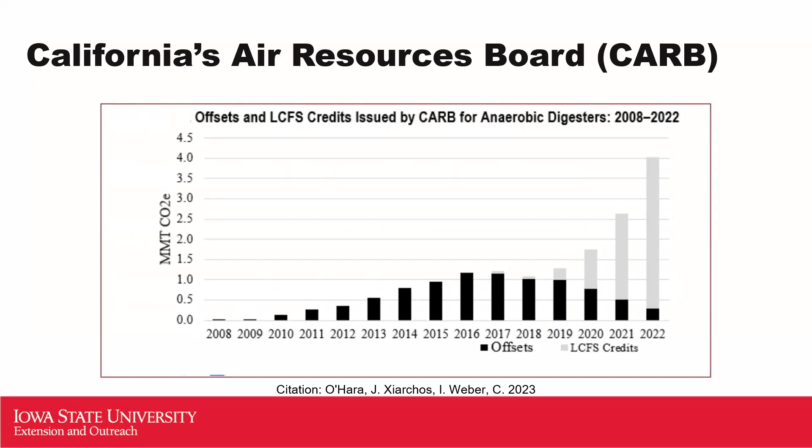Both these programs have been in place for a while, but participation is more towards LCFS. Looking through the citations and their data, you cannot be stacking both projects. They're wanting you to be a participant in one or the other. But it started out with carbon offsets where methane was just being flared, but now into LCFS where you can actually get the transportation fuel credit for it.

Price-wise, I looked through some of the data for where the LCFS market for California's credits are. We are actually down to around $55 per ton. It actually was pretty high, around 220 at one time, I believe, back in early January 2020, but still pretty good numbers to work with.

Average $75 per metric ton. So for natural gas, that turns around, natural gas is around 53 kilograms of CO2 per million BTUs. So for a lagoon to digester covered lagoon project, that translates to around $31 per million BTUs. If we take deep pit to digester, you can see the conversion numbers right there. We are at $16 per million BTUs. So those numbers are pretty good numbers.

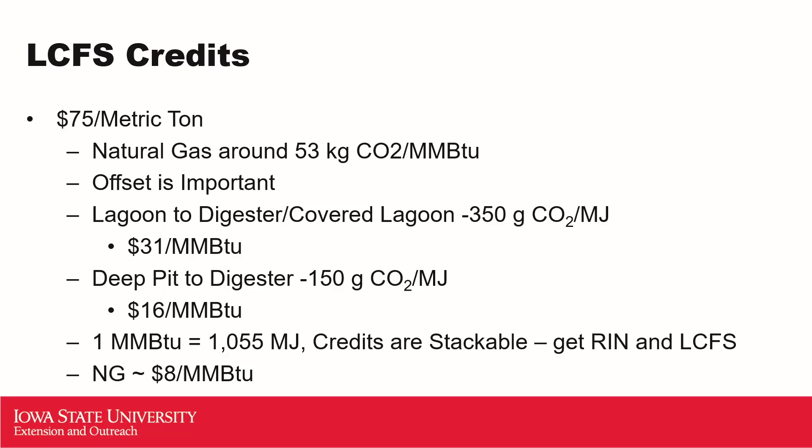The other thing is some of the programs may allow stacking, so RINs and LCFS credits can get stacked one on top of the other. EPA is where the RINs are. So anaerobic digestion projects where we are using agricultural materials to produce methane. These projects get renewable identification numbers assigned to them for every gallon of natural gas produced. And it comes from the renewable fuel standard, provided that the biogas that is produced gets processed and is actually used as a transportation fuel in the transportation sector.

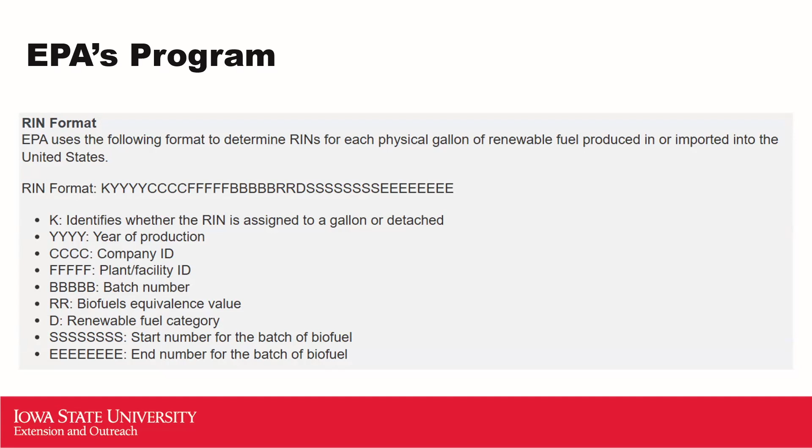D3 RINs are around 320, 325, whereas the D4, 5, 6 are a little under $1. So if you were to do the conversions there, I've shared them in the slide set. A $3 D3 RIN comes out to be around $35 per million BTUs. Just natural gas by itself there, $8 per million BTUs. D3 RINs come from digestion of agricultural manures and cellulosic residues coming from ag sources, whereas food waste are the D5 RINs.

There are other carbon offset markets out there where we can get carbon credits.

American Carbon Registry is one of them, Verra is another one, and the Integrity Council for Voluntary Carbon Market is another one. The IC is actually the European carbon market, but they also have pretty good prices. The European carbon price, just looking at it the other day, is around $67 per credit that is offered. So that's doing relatively good for pricing.

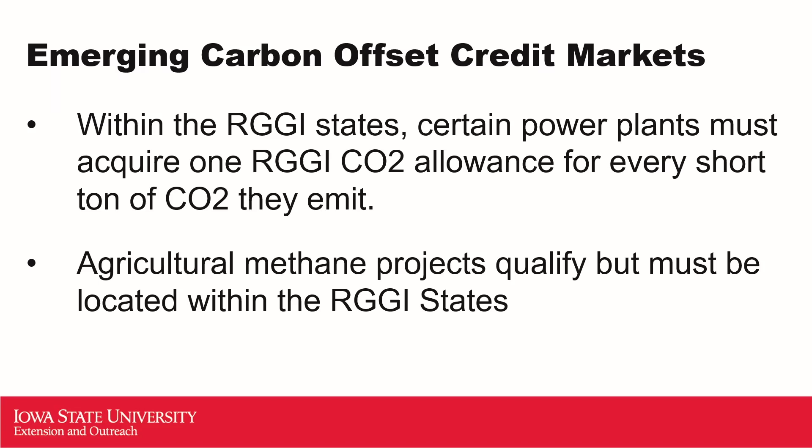But agricultural methane production projects coming from ag sources qualify. However, they do have the restriction on them that the project must be within those states. RGGI is right now going through the entire review of their entire process, and we'll have to just wait and see what new recommendations they come out from there.

There is quite a bit of other additional discussion going on of capturing biogenic CO2 that we produce through the anaerobic digestion. Definitely, we are separating methane out of it, but can we also get CO2 concentrated, separated out, and then either stored or get used? And if we go down that path, there are discussions going on for getting carbon credits issued for that as well.

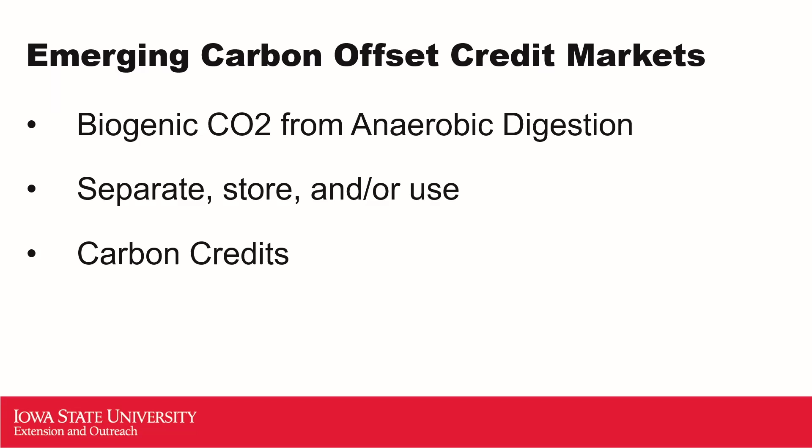One last thing that I wanted to point out for the digested solids that are produced through anaerobic digestion, they have a pathway where there can be some money paid to the landowner who uses those digested solids that are composted and converted into organic matter, so to speak. Organic farming program that's run by USDA has some funds to directly pay landowners if they are using compost to improve the organic matter content of their soils for improved soil quality.

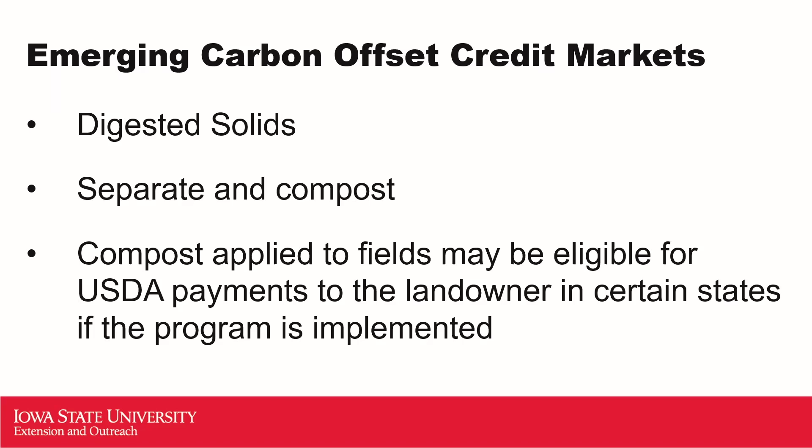The program has to be implemented by the state and must be running for the landowner to be able to apply for those funds, but I've heard payments of around $75 to $100 per acre actually going to the landowner for putting compost down.

So key points that I do want to point out for all these registries are, every one of these registries requires validation of the credits that are being offered. And then whoever turns around and buys the credits requires valid verification for those. So there are costs that are involved in the entire process. So when you see the prices, do understand that there are costs that will tag on for participation in the program.

Another thing is project participation in multiple registries or double dipping is typically not allowed. Certain registries have contracts in which these stipulations are laid out that you'll only be offering the credits in one registry and not be doing it in other ones. And last one is I may have left out maybe one or two other registries, but every one of the ones is following pretty good standards and the prices are good.

Policies, governmental policies do come into play. We may see other registries emerge if the carbon market stays strong, but if we get political pressures, there is possibilities that markets may vanish as well over time, as was the case with the Chicago Climate Exchange. So we do need to be aware of those market fluctuations that show alongside for those.

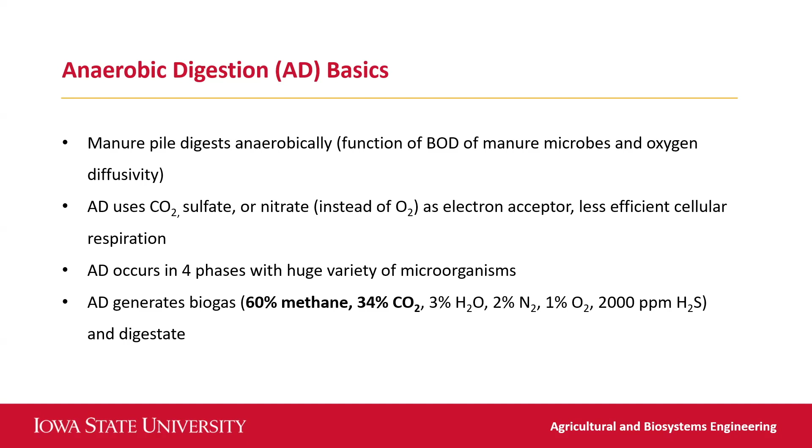and that biogas, in this project at least, we're going to be talking about making renewable natural gas, specifically because that is a transportation fuel, and we can collect those low carbon fuel standard credits and those renewable identification number credits, those RINs and LCFS, by making that transportation fuel. And that's going to be very lucrative for our revenue.

So to begin the model, we have 2 types of animals that we're going to talk about today, dairy and swine. We're going to talk about 3 different manure storage types: the outdoor tank, the lagoon, and the deep pit. And then we're going to talk about emptying frequencies, 1 time per year or 2 times per year. And that makes a big difference how often you're emptying your manure storage.

If you're at a typical swine facility, you'll likely empty your manure storage about once a year. If you're at a dairy facility, now the manure generated from dairy is a lot. It's a lot of manure from dairy. And so you're typically emptying 2 times per year or more. So we'll look at both of those models.

And we're going to talk about farm sizes ranging from 100 to 5,000 cows, and swine farms ranging from 1,200 to 35,000 swine. We're going to talk about 3 different types of anaerobic digesters, the covered manure storage. Now, if you look at AgStar's data and trends, the covered lagoon digester is the most common digester in the United States.

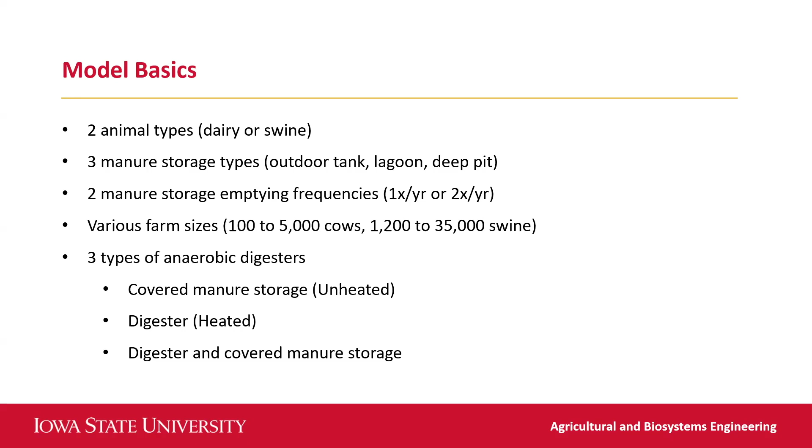And that is what we're modeling there, is a covered manure storage. It could be a covered lagoon. It could be a manure storage where you're covering it. And that's not heated. It's not mixed. It's simply harnessing that biogas from that manure storage. And that's an unheated system. And then we'll look at heated systems, digesters, heated, sometimes mixed. And then we'll look at what if you have a digester and a covered manure storage.

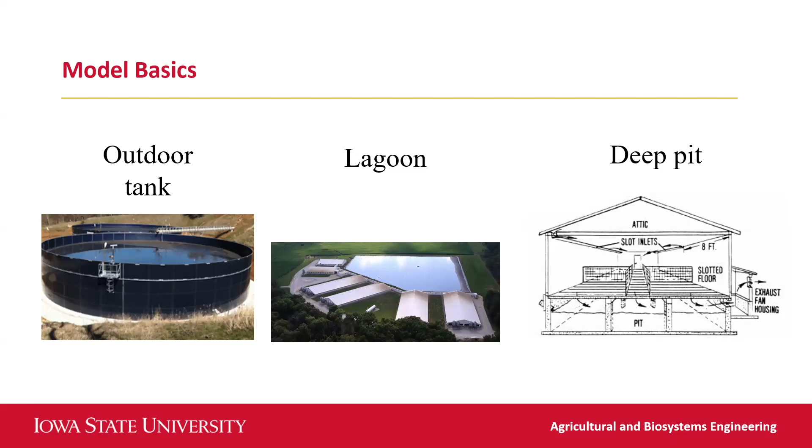And this is kind of what our manure vessels look like. We have the outdoor tank, we have the lagoon, and we have the deep pit. Now notice the deep pit collects manure below the slotted floors, or the slats. And so you can't simply cover a deep pit, and we'll talk about that in a little bit. But you can cover a lagoon. You can cover an outdoor tank. Just that covering a deep pit, how's the manure going to get to the pit if we're covering the pit? We're going to have to build a new storage.

So conventional farms, we have dairy farms. They oftentimes use an uncovered manure storage. Sometimes it's a tank, sometimes it's below ground, not below the barn, but somewhere else in a different section. And then we have swine farms, the deep pits, that's below the barn. And then we have the swine farm with the lagoon. And in all of those situations, the biogas is simply being released in the atmosphere, releasing methane and carbon dioxide

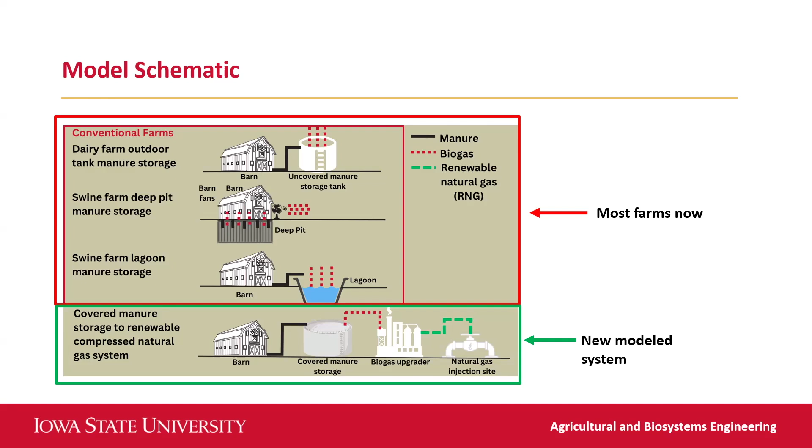in our atmosphere. And so the first system we're going to talk about, the most common anaerobic digester system, is that covered manure storage. And that's our modeled system at the bottom. So we have the barn, we have the covered manure storage, and we have the biogas upgrader. So that's going to convert that biogas to a nice pure stream of methane. It's not going to be completely pure, but it'll be pure enough. We can get around 97%, 98% methane, and we can put it into the natural gas grid. We can put it into the grid, and we can collect our carbon credits.

So our sources of revenue are going to come from natural gas sales, notably very low compared to the carbon credits that we receive, the RIN credits and the LCFS credits. And these values, these percentages of the revenue, those are based on the last 6 years of averages. But currently, and I'll talk about this soon, the LCFS market is a bit down and the RIN market is a bit up. So those sources of revenue, that's based on the last 6 years between 2018 and 2024.

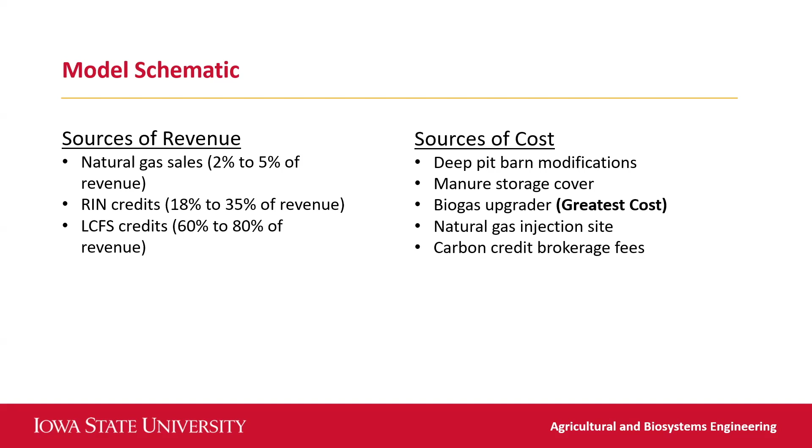Our sources of cost are going to be the deep pit barn modifications. If you have a deep pit barn, you need to build additional manure storage. You need to build something you can cover. So we'll cover that. The manure storage cover, the biogas upgrader, that's going to be our largest cost. That's a large piece of machinery. The natural gas injection site, depending on your situation, could be a very high cost, typically a high cost, and carbon credit brokerage fees. And there's another schematic to kind of look at it with nice pictures.

We have cows and we have pigs, and they are excreting manure, and that manure is going into a storage. And we need that storage to be a covered storage so that we can harness that biogas from the manure storage. And we're looking at how many cows does it take to profit? How many pigs does it take to profit? And when we talk about profit in this situation, we're really just talking about economic feasibility. Who can even play in the game?

And then once we have that covered storage, we need that big piece of equipment, that big machinery, that biogas upgrader to purify that stream of biogas to renewable natural gas, and then inject that natural gas into the grid. And we're talking about a 5-year project life, 8% interest. That's important. So when we talk about what's a break even, we're talking about breaking even in 5 years. And depending on your situation, maybe you can afford more years, maybe you can't.

Important stuff. Cost, basic review: the impermeable cover that we need to cover the storage, if you're annualizing that value over 5 years, that's going to range between about $13,000 per year to about $167,000 per year. And that includes maintenance costs to repair tears in the cover. The biogas upgrader is a project. We have project estimate costs from 6 separate companies, all European, and literature values. And we'll talk about that in a second. That's the next slide, because that is a big cost, and it's important to know that one.

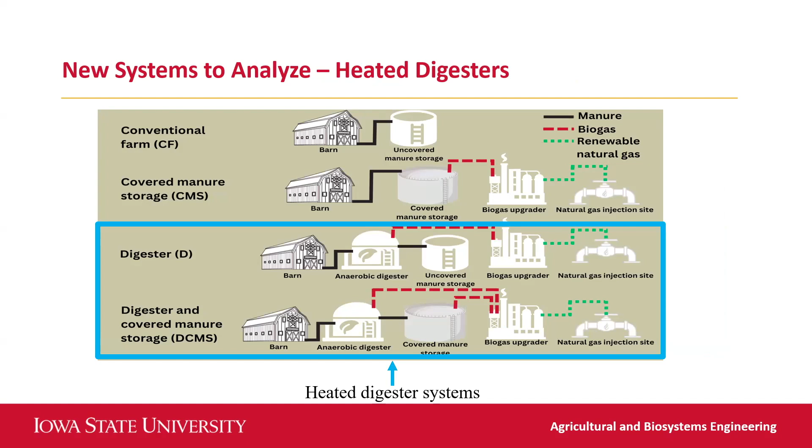An overview of digesters: you have 3 types. You have the unheated, that covered storage. You have the heated complete mixed digester. And then you have the heated plug flow. When we talk about digesters, sometimes we talk in terms of percent of anaerobic digestion efficiency. In the digester world, the BMP, the biochemical methane production, is really your 100% anaerobic digestion efficiency. And we measure digesters as what percent of the BMP we are achieving.

If you're an unheated digester using Iowa temperatures, using the Tier 1 Simplified CI calculator published by the California Air Resources Board, we have found that you will have about 67% of your BMP achieved if the manure storage is emptied once a year, and 42% if it's emptied twice a year. That's quite a difference, but that's also a difference of 6 months of retention.

Washington State, they have a calculator for digesters. If you buy a digester, you're gonna also look to spend between $1 and $4 million. That's another very large expense. If you're buying a heated digester, that is a large expense.

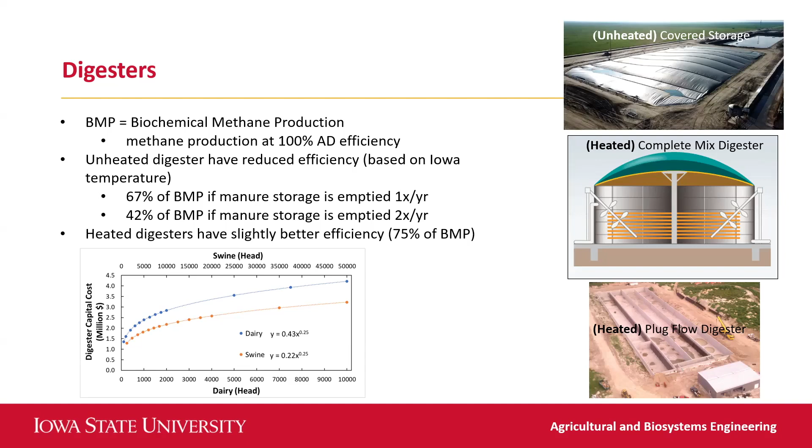Now, the CI score, that carbon intensity score, is best in the covered storage. And the reason is because with the digester, you have to invest some of the gas that you're making to heat your system. In the covered storage, you're not heating the system. You have a lesser energy input. You're going to have a better carbon intensity or fewer grams of carbon dioxide equivalents per megajoule achieved.

And the first key point is if you're emptying your manure storage less, you're going to have greater gas production every time you're emptying once compared to twice. But depending on your storage size, that may not be feasible. And the second point is the digester is not necessarily more profitable than the covered storage. It's really a function of the outdoor temperature, your digestion efficiency, your relation to CI score.

There are a lot of companies that work in southern states, and they're very effective by just having a covered storage. With a covered storage, you could have a retention of 6 months to a year. And in the right conditions with the right heat, that could be effective at generating a lot of methane and breaking down a lot of those volatile solids to where you don't even need a digester. So we see if you're emptying once a year, the covered storage is actually more profitable than the digester. And these are all based on a 400 head farm.

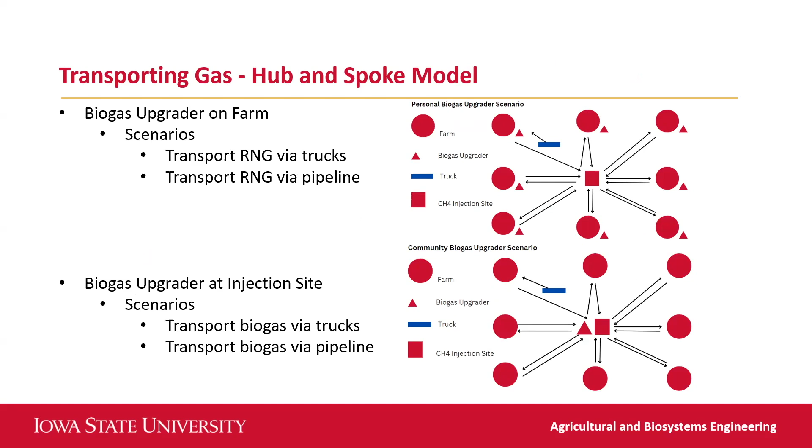And to conclude this, in the future, it's very unlikely you're going to be able to inject your renewable natural gas at your farm wherever you live. You have to analyze hub and spoke models. So either you have a biogas upgrader on your farm, or you have a biogas upgrader at a centralized location where there's also an injection site. So you're either transporting RNG or you're transporting biogas, and you're transporting them either by trucks or by pipelines. And that's kind of best illustrated by this figure.

In reality, we're going to have to add an additional cost for moving the gas. You could move the manure, but you could move the gas too. And typically right now that's done by moving renewable natural gas. But we've been investigating, you could move biogas by pipeline. You could move biogas by truck. That's not done right now. It's not impossible. You could move RNG by pipeline or RNG by truck. And those 4 different systems kind of look like that.

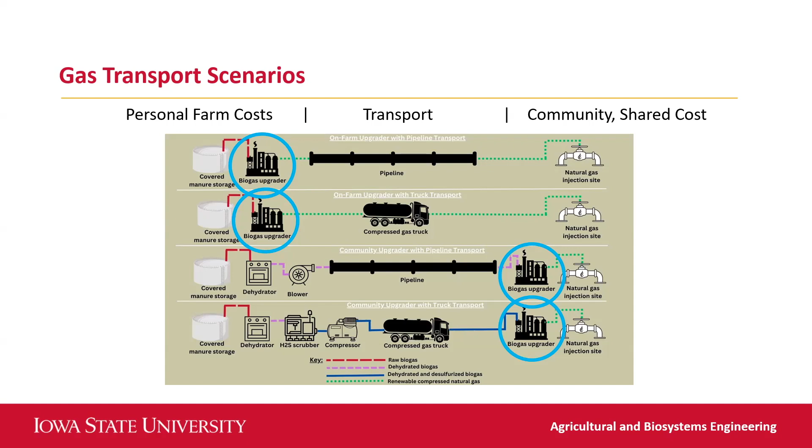The bottom system: if you have a community upgrader and you're moving biogas with a truck, you need to dehydrate it. You need to scrub it of hydrogen sulfide. You need to compress it into the truck. There are a lot of reasons why biogas isn't moved by truck right now, but these are things to investigate. We need to move gas probably to a centralized location.

And in conclusion, you need roughly 1,200 dairy cows to break even in 5 years, emptying your manure storage twice a year. That's just to get your head in the game. To begin, you need about 8,600 swine to break even in 5 years. That's the lagoon manure storage. If you're in a deep pit, we're in trouble. We need innovation for the deep pit swine farms to break even under the current assumptions.

75% of the Iowa dairy herd exists on farms right now where AD could be economically feasible. The covered storage is most profitable until roughly 5,000 dairy head, and then the next most profitable option is the digester and covered storage. And the digester and covered storage option was always more profitable than the digester alone.

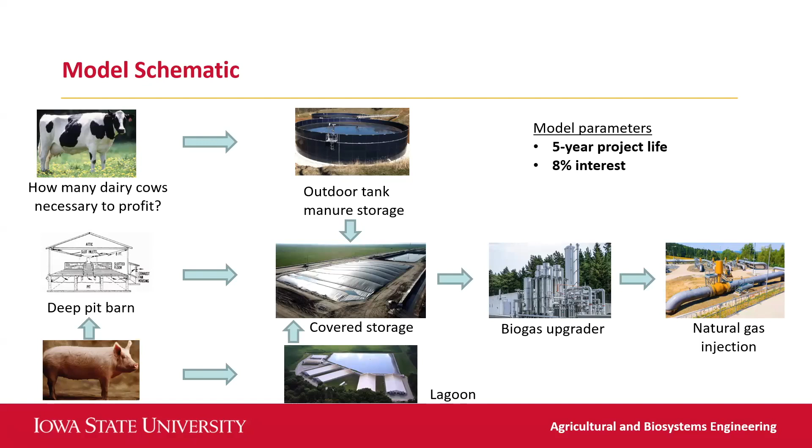All right, thanks, Luke. We did have a question for you. The question was really about installation cost and payback period. You said you didn't include engineering costs, but is your cost just to purchase the equipment, or is it to install the equipment? My understanding, based on how you got that data from literature reviews, is it would be the installed price of the equipment, the cover, or the digester. Correct. Yes, that's an installed cost.

And they vary. If you have that upgrader, maybe between 1 and 4 million, and if you have the digester, maybe between 1 and 4 million again, that's a capital cost of maybe between 2 and 8 million if you include that digester. That's a huge range, but it also depends on your farm size.

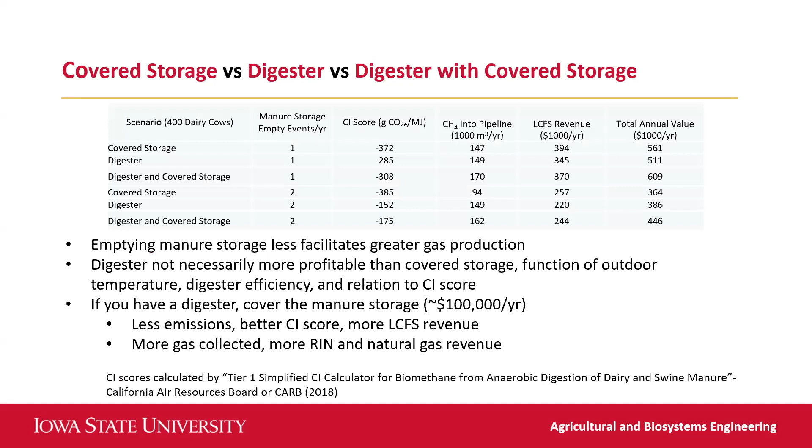All right. We have one: is the 8,600 head of swine based on a market hog? And there the answer is yes. Did you do wean to finish or grow to finish pigs? Wean to finish. So they're wean to finish farms. That's a place where we need to do a little bit more work to understand sow farm sizing as well, and that will change it up, but it was all based on wean to finish.